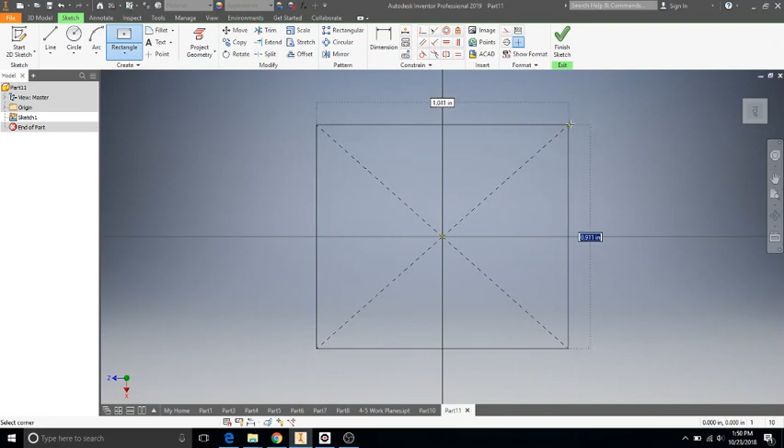So I'm going to start with this bottom plane here, and I'm going to use my 2-point center rectangle to draw the base of my trophy. Let's go ahead and do 5 tab over by 6 to get the bottom, and finish sketch.

Zooming. We're also going to be using some different kinds of work planes here. I've got the base of my trophy. Now most trophies have kind of a stand at the bottom. The columns or little pylons kind of stick up in between maybe the first stand and then like a second tier.

So if I want to create a new thickness to my bottom stand, you might say, hey, let's do extrude.

That works, but I kind of want a spot that's angled up here in the front so that I can put the name of the award right there for everyone to see, so they can see how amazing I am at my achievements.

And so we want to have that plaque in the front. So what we could do is extrude and then draw a triangle to kind of cut a wedge away. That would be one strategy.

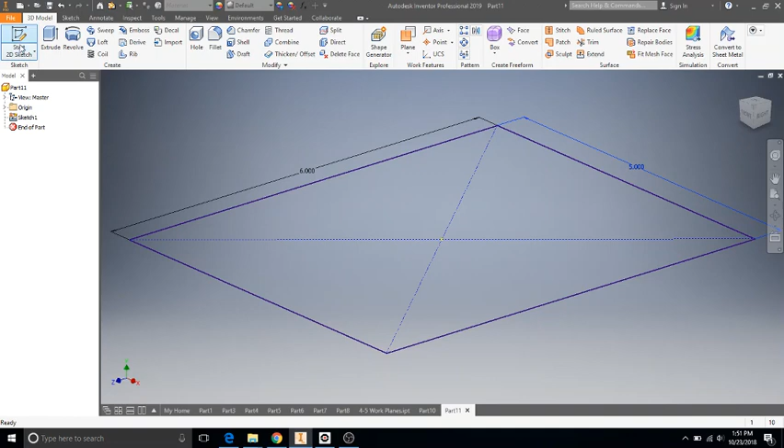Rather, I'm just going to kind of do it all at once. There are a bunch of ways to do this, chamfer and other things as well too. But I think it's a new tool, and it's a good excuse. We're going to use this a couple times.

So I'm going to create a new sketch, but I want it a little bit taller than this one. In order to do that, this is kind of like what I briefly touched on in the last video - selecting offset from plane.

We're creating a sketch offset from the plane at the same time. So you can click and drag up. I'm going to make it an inch high and press the green check mark. So what I've done is I've just created a plane on which I can draw, and a sketch.

I'm in a sketch that is directly above this, and I want to draw this a little narrower up top. It's going to be the top part of that platform, and then we're going to join them together using one of our new tools. Notice if you want to draw this, it's going to have the same back line on the top level because it's going to have a straight back here in the back.

If you want that redrawn for you automatically, you can choose this Project Geometry tool. It will take the line from the back and throw it onto your new sketch in the front. Click what you want carried over, and boom, that's carried over to your next sketch, which is amazing and very easy to save. It's a time saver, basically.

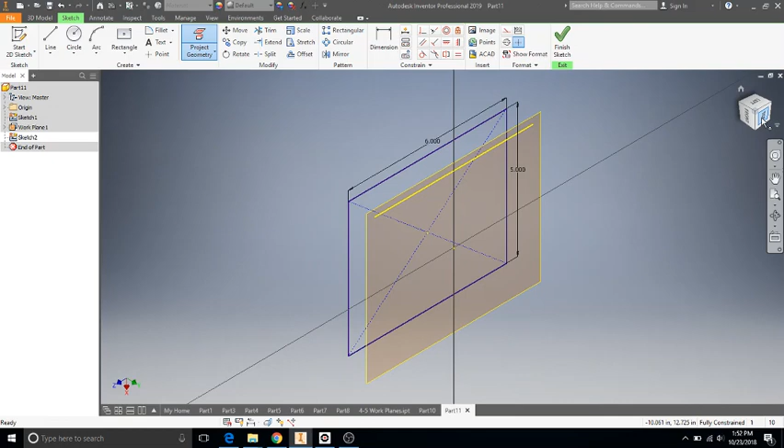Now I want there to be like an inch difference for that slope, and you'll see what I mean in just a minute. So I'm going to come on down to here. It was 5 inches across, so I'll make it 4, and then come across here perpendicularly, snapping to that.

Is that snapping? Oh, it's not. So I'm going to have to start from over here. I should have projected the other line as well. Okay, now this is in line, and I can come across here to snap.

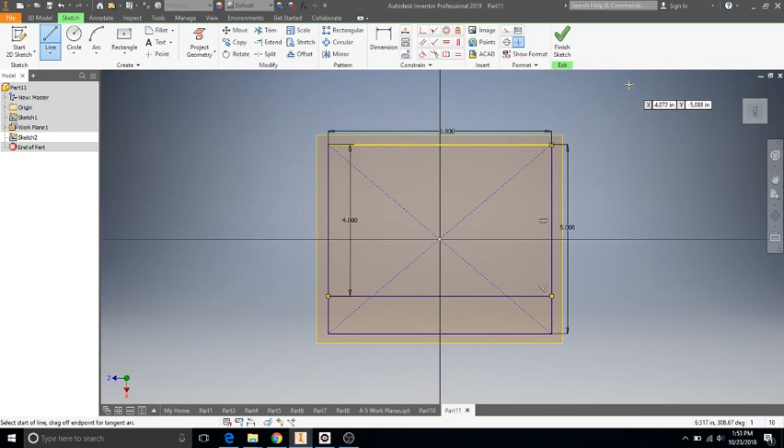Great, all right, cool. Now I've got an enclosed figure in the top and in the bottom, which means I can loft. So click between the two objects you'd like to join, and what it's going to do is map the corners to each other. It's going to map all the points on the side to each other and create this really nice little stand shape.

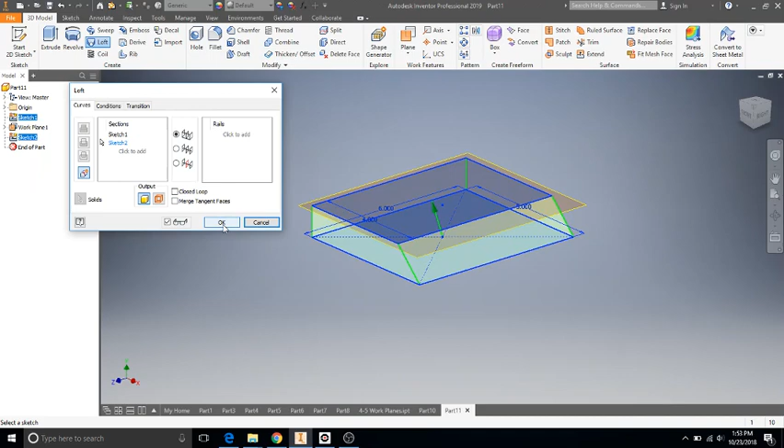Now I can go ahead and put the title of my award. It's going to be going down right there so everyone can see what an accomplished human being I am. We'll just wait - you guys just wait.

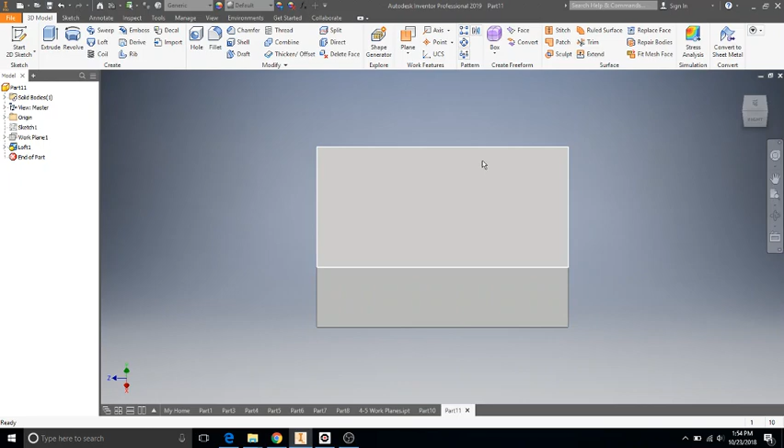Here we go. Game time. Alright, now it's time to do something interesting.

I want some sort of supporting column or pylon here that's going to connect, and I don't want to make it a boring old cylinder. That's no fun. So what I'm going to do is create a sketch here. I'm going to draw a circle.

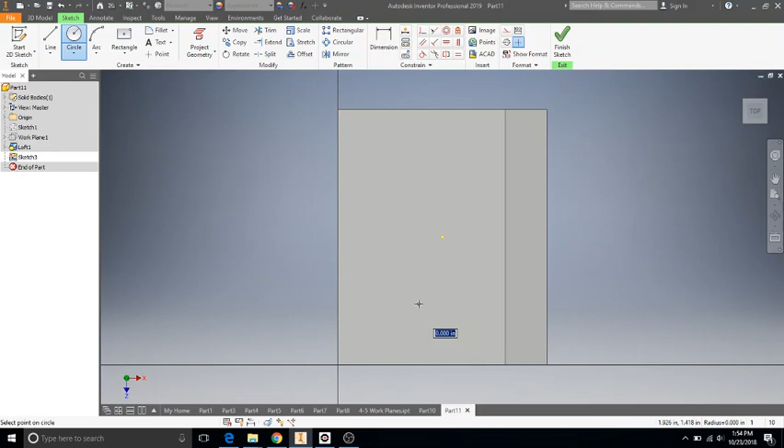Can I explain myself? I'm going to connect from here to here, that needs to be 2 inches if I want it centered, since it's 4 inches, and from here to here we'll just call that 1.5 and call that good.

Okay cool, I'm going to draw one column at a time just because I think this is the easiest way I've seen to figure it out.

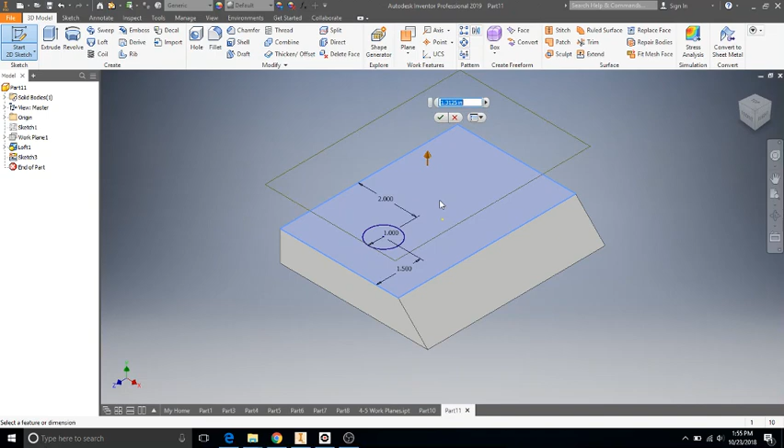Drawing this column, what I want to do is make my column not look like a cylinder. I want it to kind of morph as it rises, and this is the cool thing about the Loft tool. My pylon is going to be 3 inches high.

So what I want to do is connect this. I want the base to be a circle, but I want the top of my supporting pylon to be a square or a rectangle. And you're thinking, well, how are you going to get those together?

Well, that's what Loft does. It can take two shapes that are, I know we did two rectangles before, they don't have to be the same, it can be anything, which is bizarre, why this is such an amazing tool.

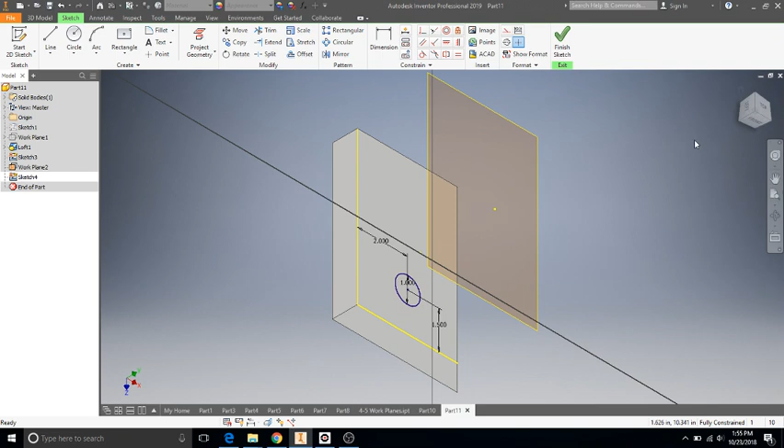So I'm going to come back here from my top view. Now notice if I try and draw, let's use this, we want it centered, let's say we want a 2-point rectangle centered. You'll notice it's not snapping to anything because there's nothing there.

That means we should use project geometry. Now I'm not going to project the circle itself, but just the center. Now the center is popped up onto my plane. I can get my 2-point rectangle and do a 2x2 little square there.

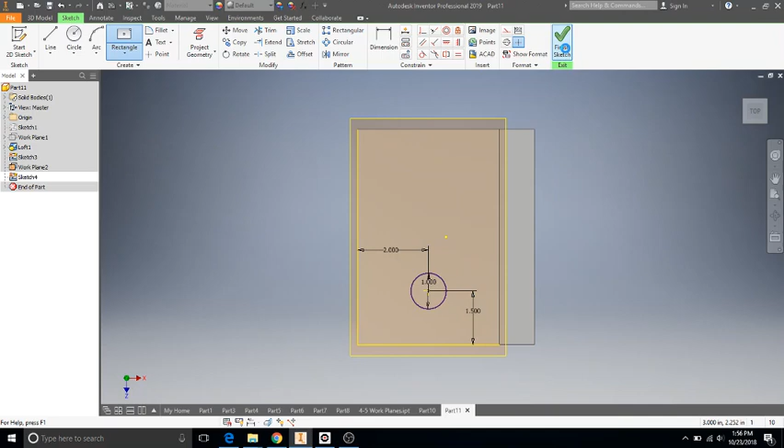Press finish sketch. Whoops, try that again. Back into the sketch. Control Z. Let's edit that from the top. From the top, not the way top. Please, not the top. Okay, now I got my rectangle there.

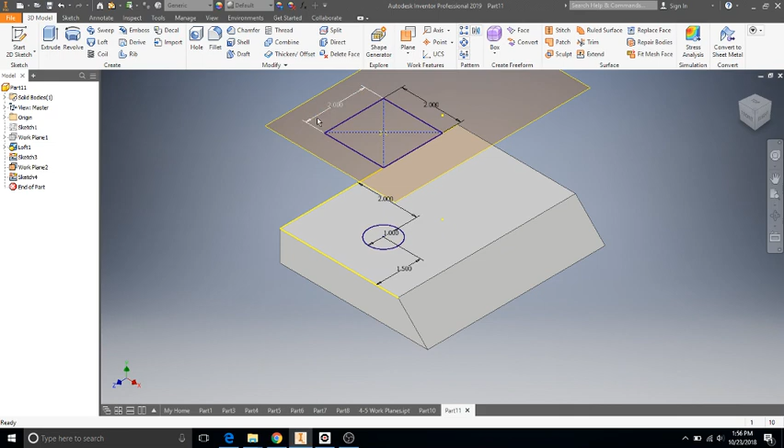And it doesn't have to be directly centered, it could be off center and that would be just fine. So what this allows us to do now is I can take this and loft the circle up to that rectangle, and it will create this really amazing supporting structure.

Now if you go into the Conditions tab, you can choose which condition you're leaning towards. There's the free condition and the direction condition, and that kind of determines the shape at which it's headed between those two faces.

I've noticed that the direction condition looks like it's heading towards that plane at like a 90-degree angle, so normal to the plane for those that understand that language, and this is just directly. The other one, the free, is kind of just in a straight line from point to point.

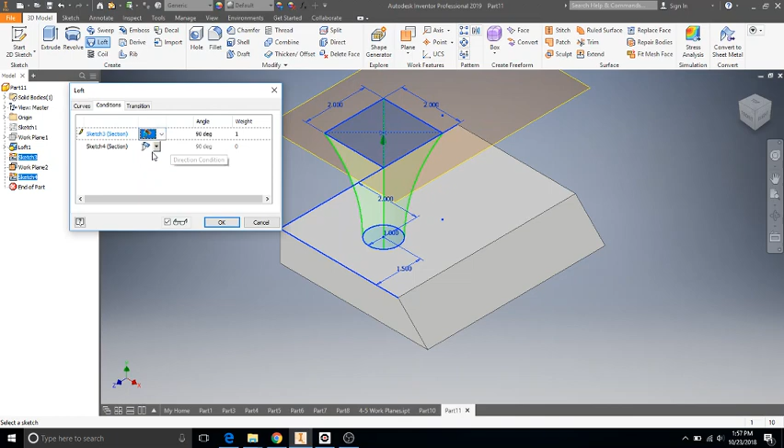So I kind of like it looking like that. I think that looks kind of cool. So I'm going to call that my supporting structure.

Now this is where it gets weird. You're probably thinking, why didn't you just draw another circle over here and then another rectangle? As far as I figured out, you cannot loft more than one object in a sketch at the same time. At least I have not figured out a way.

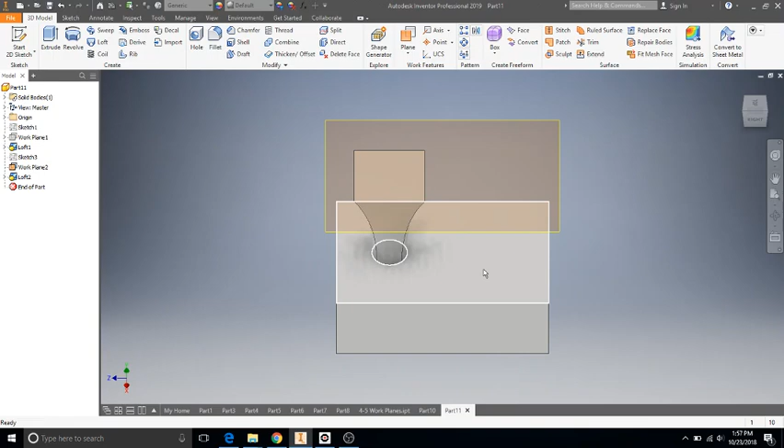So unfortunately you have to draw that and repeat the process, coming back into your drawing to draw another circle and then doing the same thing over again. But rather than bore you with that, since I'm doing two and it's a symmetric pattern, I'm going to show you a way to use symmetry to get this done. This is a cool skill to practice here. You'll notice if I go into my solid bodies tab, I've got one solid body.

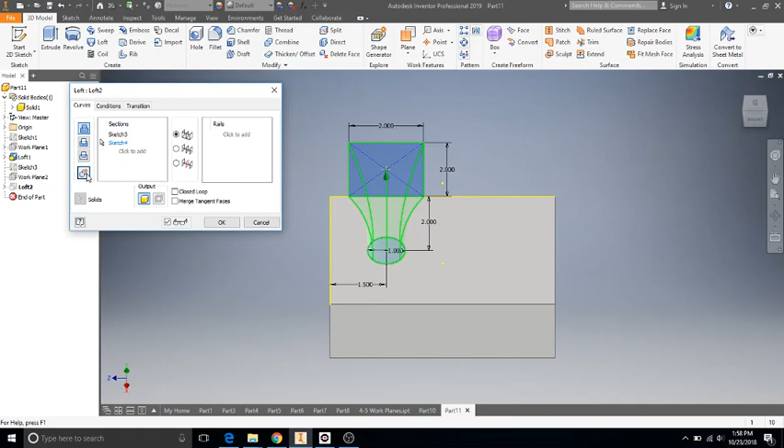If I click on the loft and go to edit loft, you can make this a new solid, so it's separate from the others. Now I have the lofted piece as a solid, and I have my bottom piece as a solid.

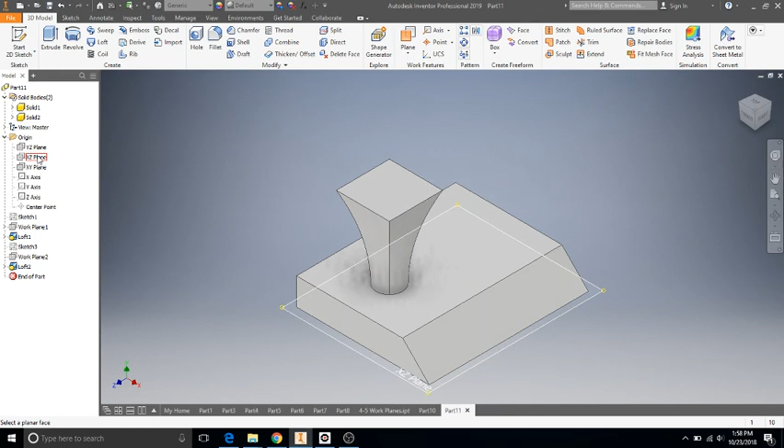Since I've centered my object from the beginning, I can create a work plane offset from the plane. I like this one, it doesn't actually have to be offset, that's why it's kind of tricky. Come over here to the Origin drop-down menu, and we're going to choose a plane right here. We're not going to offset it at all because it's dead centered in our object, since we centered our object by the origin.

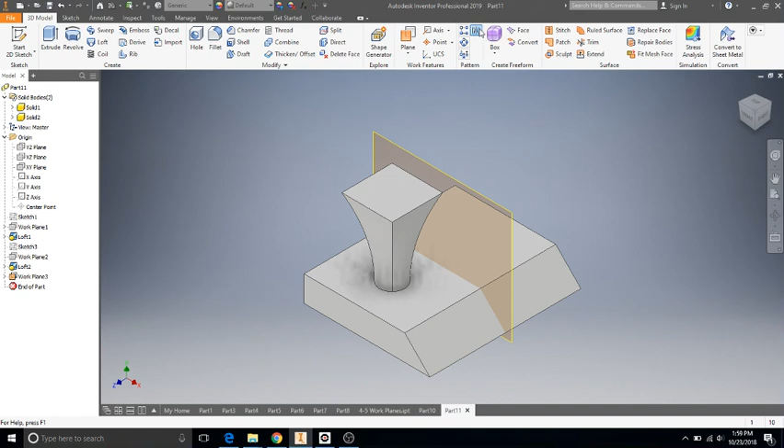Now, since I've made this shape its own solid body, and I have a mid-plane cutting through my object, I can use the mirror option to select this pylon feature around this plane, and it will automatically create another copy. So there we have that, and if you don't like looking at this work plane, you can delete it or make it invisible.

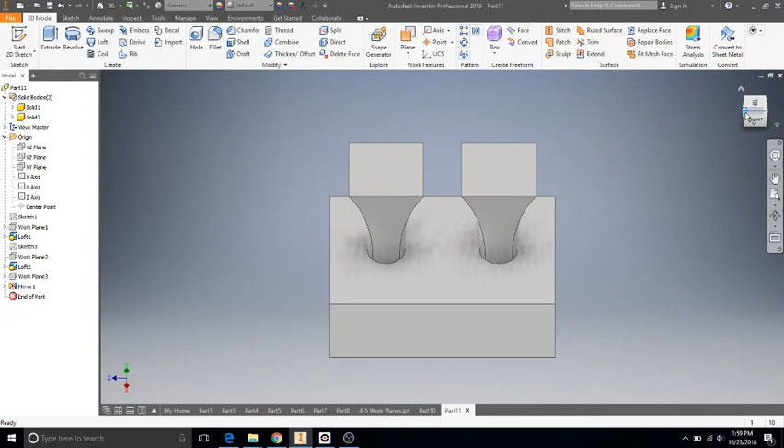So I've got my supporting structure. I now want to create a second little platform up here, in a different shape. To do that, I'll press Start 2D Sketch - there are two ways to do it. You can press Start 2D Sketch, click and drag up to 2.5, which was the height we determined, or click Plane, Offset from Plane, same thing, click and drag.

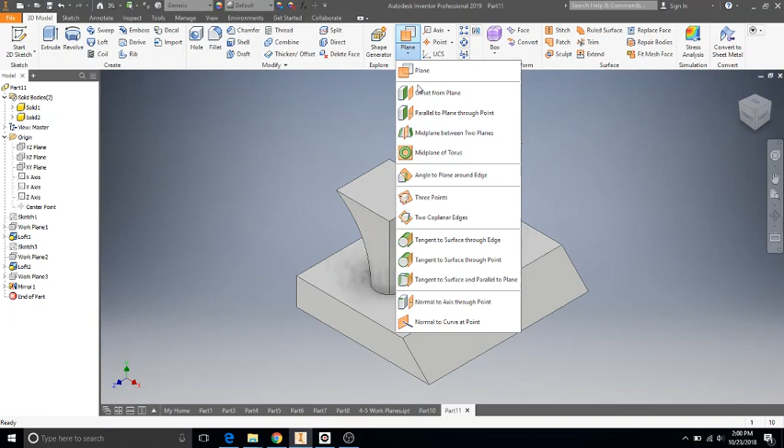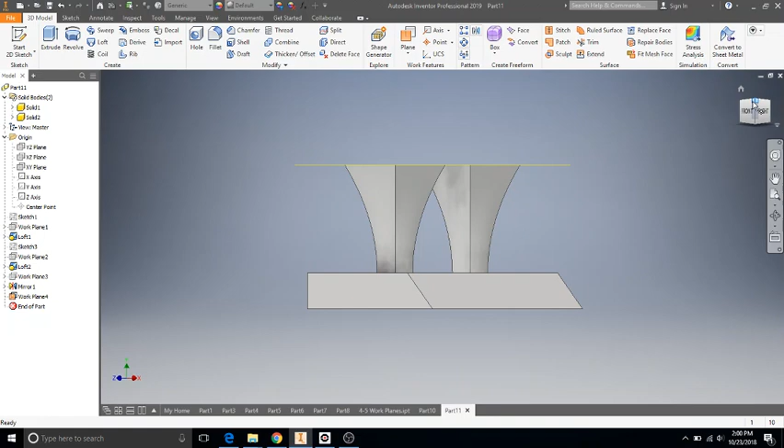The only difference here is then you have to click on the edge. Whoa, what just happened? Oh, I made it 3, didn't I? Sorry - so offset from plane, click and drag 3. Get it right on the surface. Perfect. Then you click on the edge and create a sketch.

Now let's say I want my next one to be a slightly different shape - let's do the ellipse. Oh dear, I want it lined up, centered in both directions. It's centered on that origin, but I want it centered with these lines here, so I'm going to project this line up onto my plane.

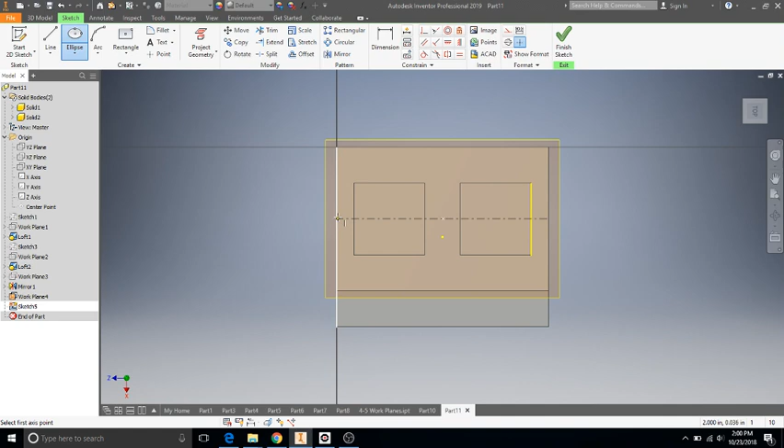Then grab the ellipse tool, because I've got it centered by this point, but I need it also centered by the midpoint of that line. Extend this out to the edge, and then extend it out this way, so I have an elliptical platform this is sitting on. Finish sketch. Beauty, beauty. Extrude.

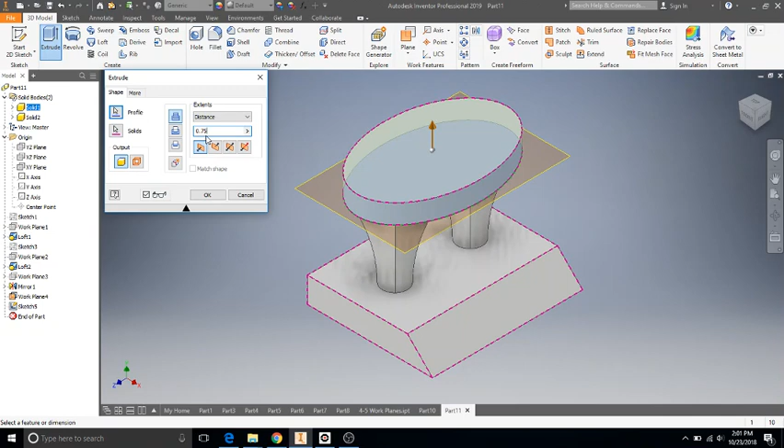Let's make that 0.75 of an inch. Awesome, and I'm thinking we should fillet that edge. Yeah, that's looking real solid. Man, this award is so fitting for all my hard work. Oh my gosh, wait, just wait. Oh man, beautiful. Okay, nice little award platform I've got built.

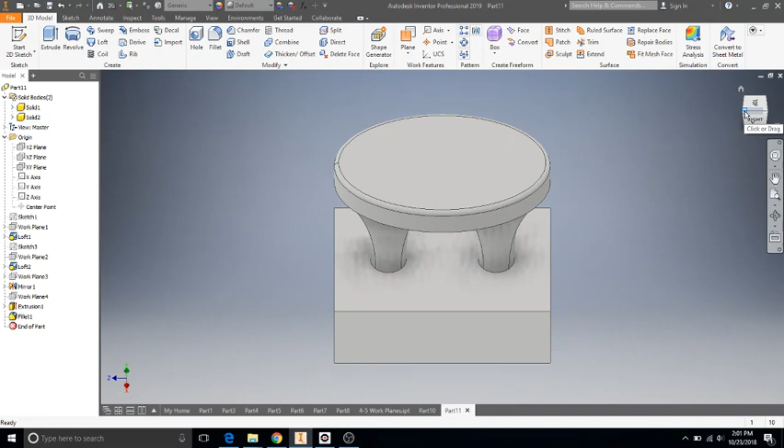And I want to put some sort of a trophy cup up there on top to celebrate and drink my celebratory fruit juice. So what I'm going to do is... now here's the biggest mistake for drawing the cup - people try and draw it on this top surface. But then when you go to rotate, you're going to create a rotation that goes into your surface. You don't want to do that.

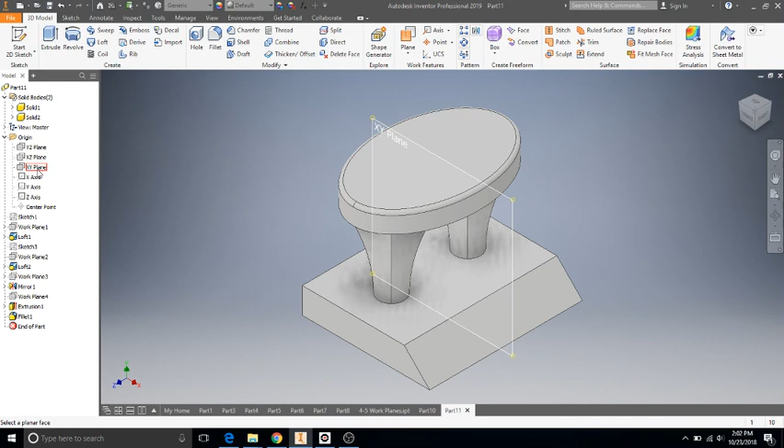You want to create an offset work plane in one of these two options. I like the XY plane because when I do that, I already have my shape centered about this and I don't have to drag it. If you had chosen the YZ plane, you'd have to click and drag it to the direction you wanted before you drew. So I'm going to keep this at 0.

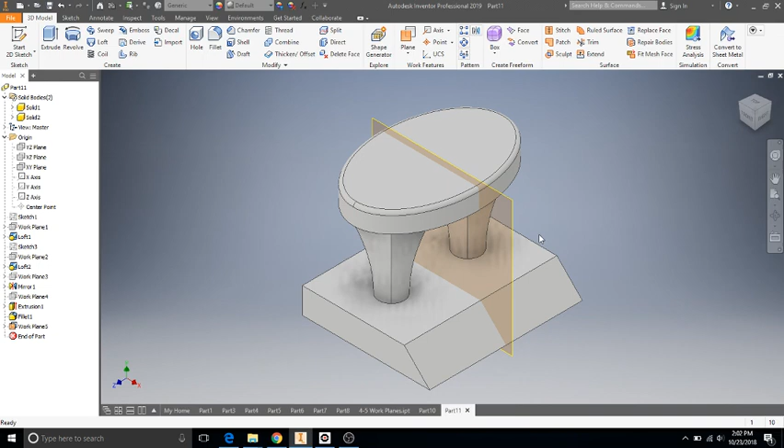Press enter, and I'm going to come through here and we're going to edit on here my cup, so to speak, my trophy cup. Alright, so my cup - we've seen me do this before.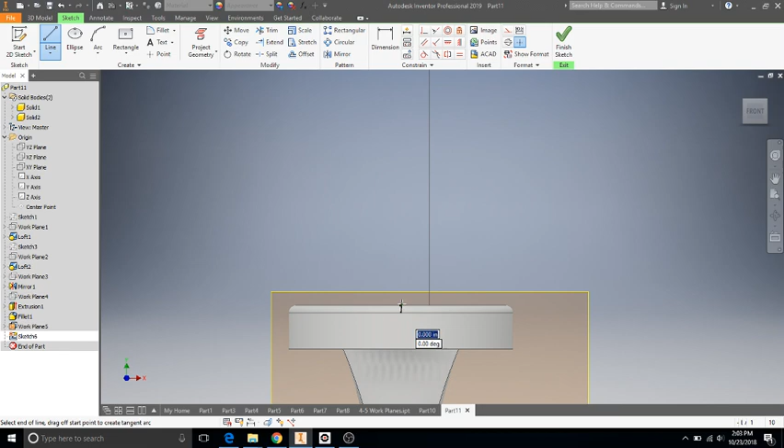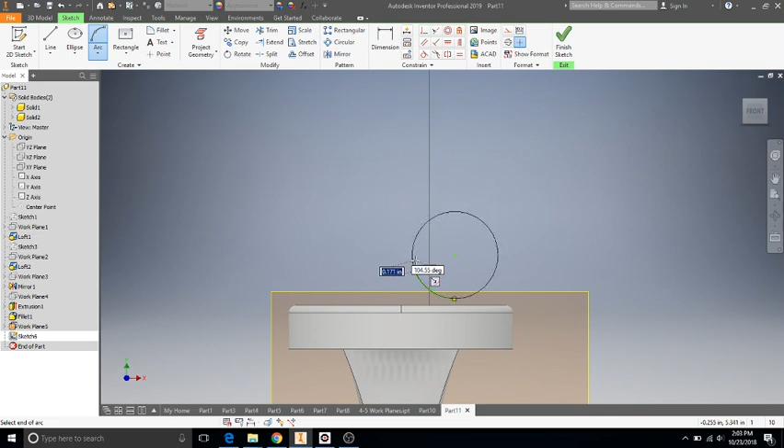Let's get this cup centered. I'm going to come over for the base of my cup, and remember we only really need to draw half. Just to make this quick, I'm going to do a series of arcs. I'll make the bottom of the cup there, and a little archy arc coming up with a bump. That looks nice, and maybe a large-ish arc for the cup at the top.

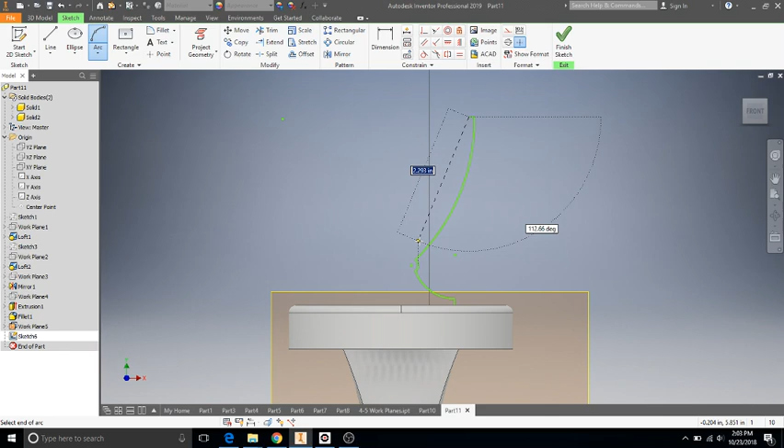Let's draw my line for the thickness and come on down here, and we need a center line here, so we got to make sure this is closed up. That's going to be the bottom of my cup, and an arc here coming down to that point. That's not super pretty, I realize. I could make it much prettier if I took the time, but I want to get through the skills here.

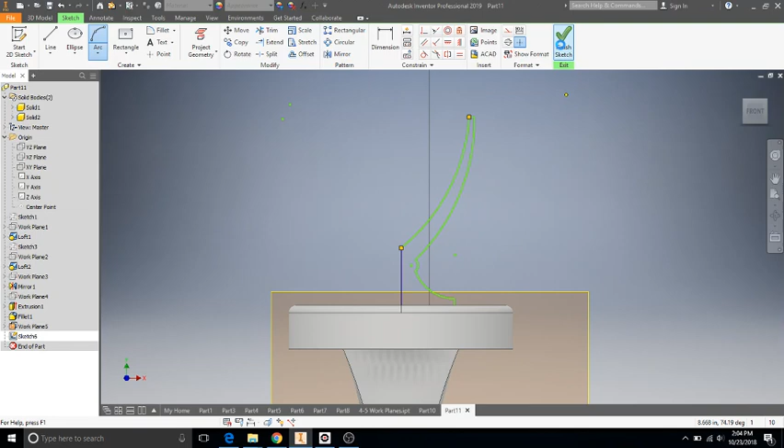Revolve, clicking the cup at the top as my profile. We are not revolving any solids here, folks, just the profile. The axis around which we're revolving is right there, and press OK.

Oh, beauty. Look at that, I have earned this award. Oh, wonderful. Wonderful, wonderful cup. Okay, fantastic.

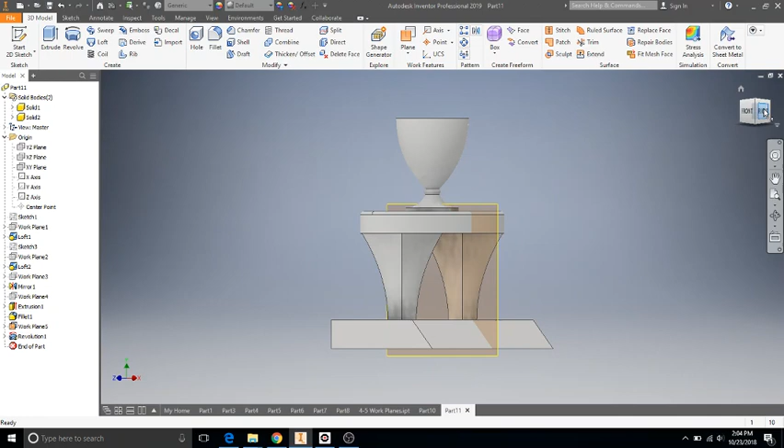And so now it's time that we title the award, time to give me what I deserve here. I'm going to click on this, create sketch. We are going to add text to here. I think this is going to spit back a little funky thingamajigger.

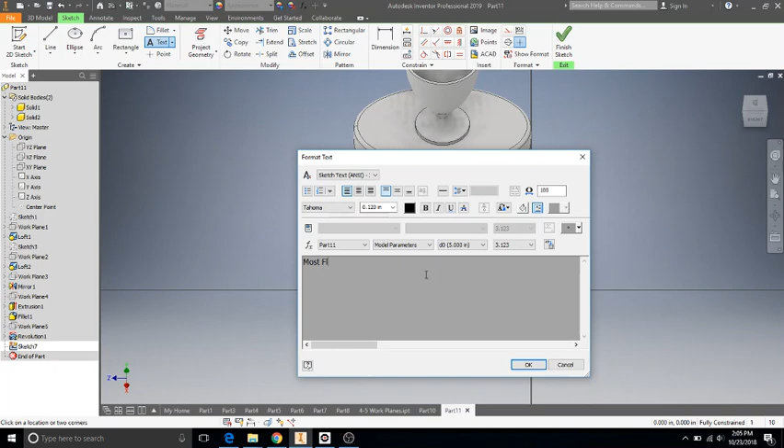I am the most flatulent human being alive.

Beautiful. Well, the problem here is that little text box is rotated the wrong way. So first thing is we're going to click down on here, click in the text. We're going to be rotating that. Let's rotate it about the center here, get that down, fitting on my object.

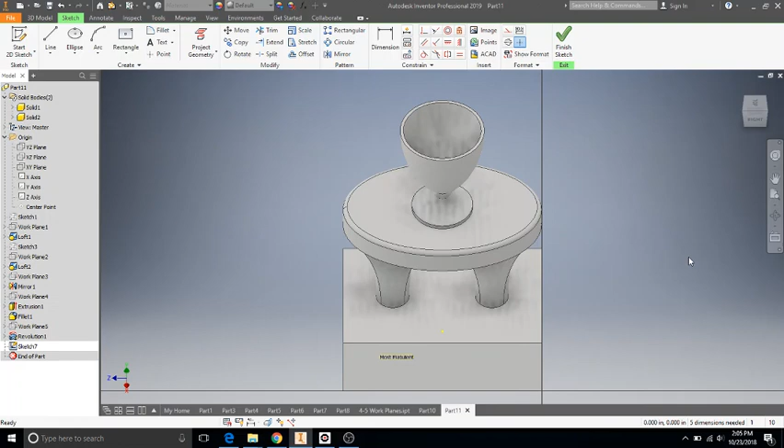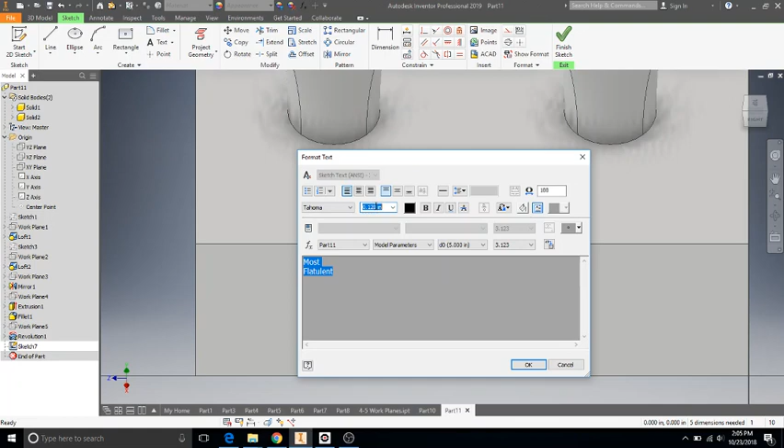Now text is a real doozy in this program. I feel like it's mainly because you have to do everything in just the right order to get it to change. So you're going to go into your object. I'm going to click escape and make sure it's highlighted. Double click. Now when you're in here, you have to highlight before you change. And I think this needs to be about 0.5 inches, if I remember.

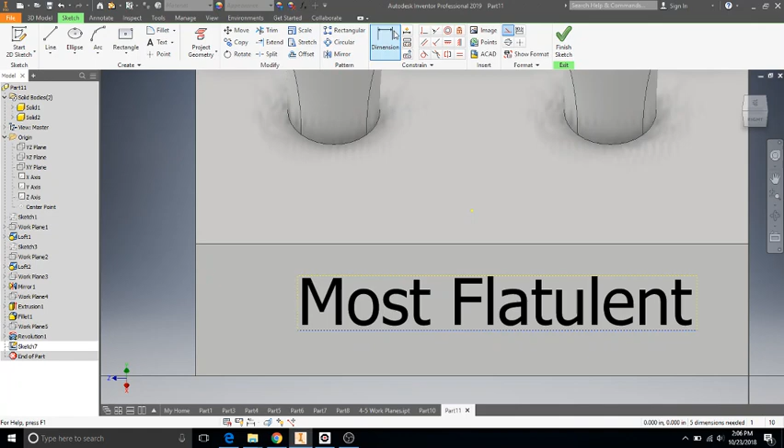You'll also notice that it's being constrained by this little text box, so you might need to click and drag the edges out so it fits better. And then if you want to get it to the right spot, centered, you could use the dimension option on the edges, or move this object about a base point. That one's a little bit harder for me to do, but you can get it pretty close.

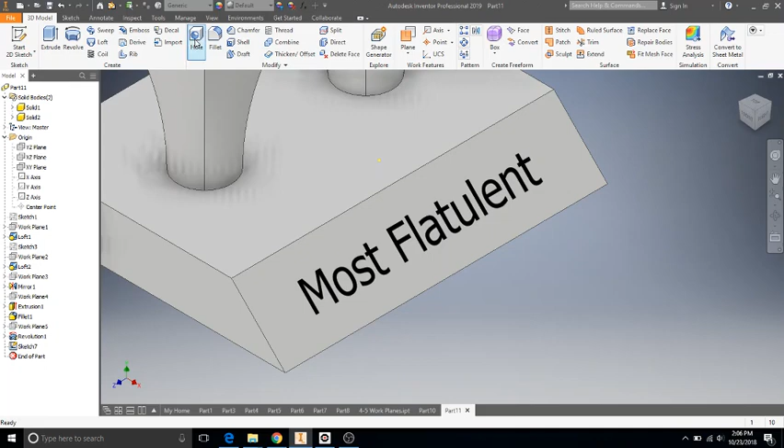To cap this off, I want to make sure that this doesn't wear off my trophy and that everyone can really truly appreciate this. So what I want to do is emboss that text on there. You can either choose to have it raised away from the surface or indented. Emboss is basically just like extrude for text, from what I've gathered. We're going to emboss from face. The profile I'm selecting is the text, and the solid is already selected, and then you choose the depth you'd like.

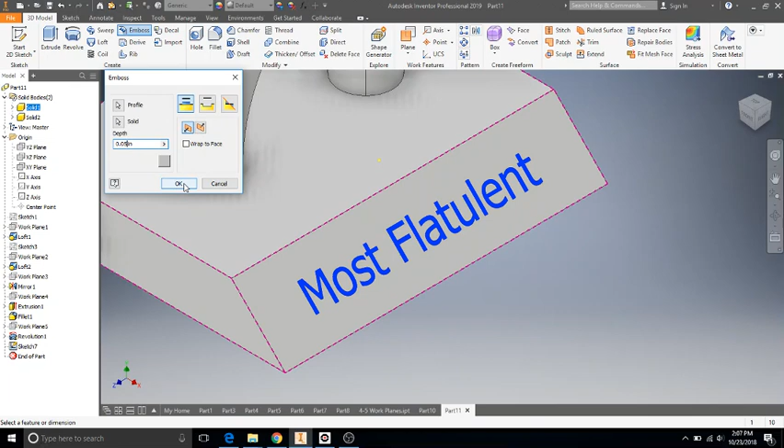0.05 inches. Okay, and press OK, and that should raise it out so you've got this nice, beautiful little detail. Perfect. And that's going to do it. So without further ado, there's our wonderful trophy.